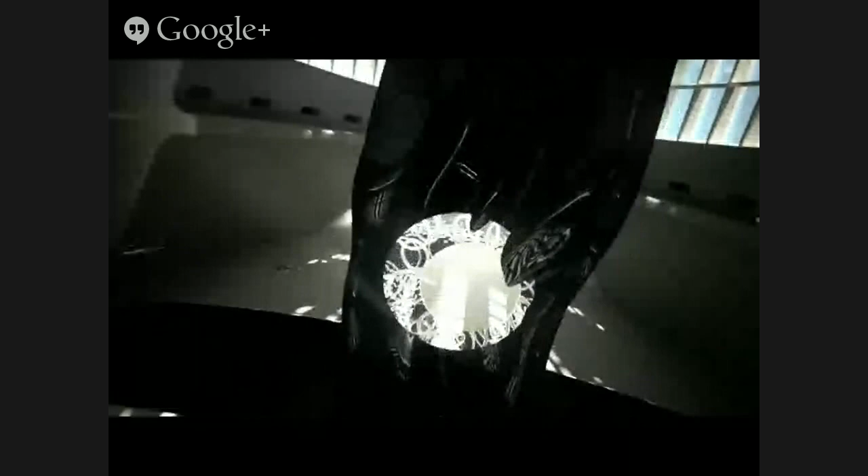This was like an introduction video of that, and we also made a website. I'm showing these because the appearance seems professional, but now I'm going to show you the background of that, so it's a little bit funny. This was the website.

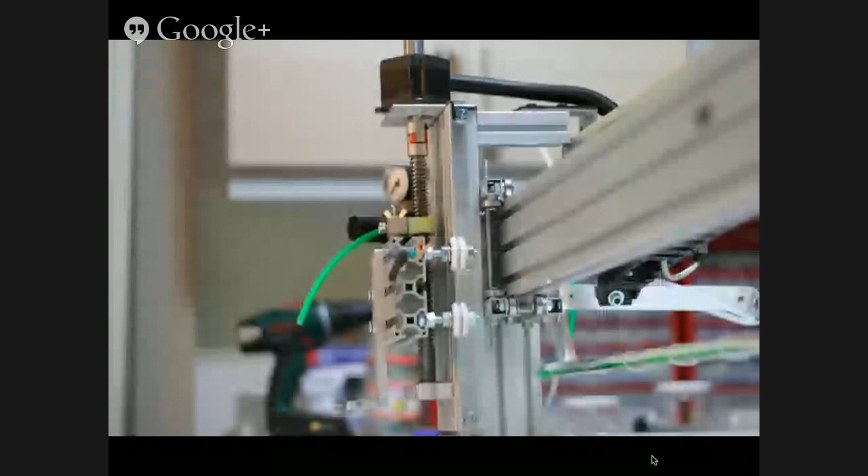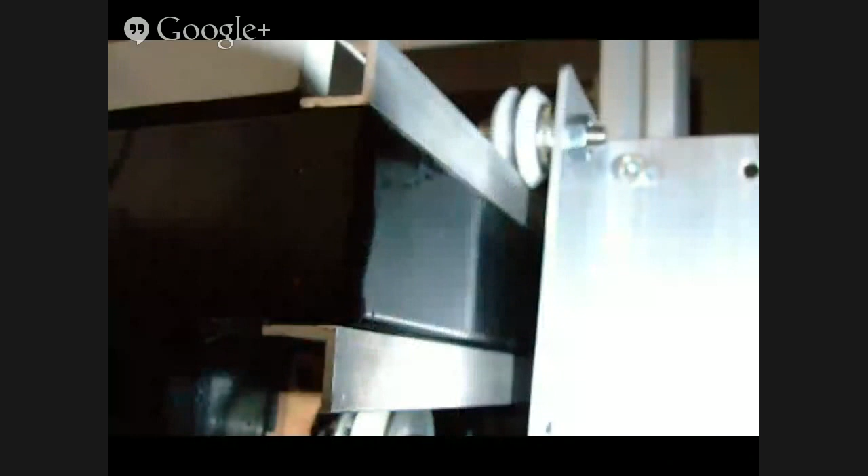So there are some components related with that. These are regular bearings, linear bearings. Stepper motors, everything is normal. And these are the normal L-shaped aluminum profiles, very cheap.

Because one of the most expensive parts in these machines are the linear motion systems. We needed a machine in the size of like 230 centimeters to 160 centimeters, and if you consider such a size, the costs related with linear motion were too high.

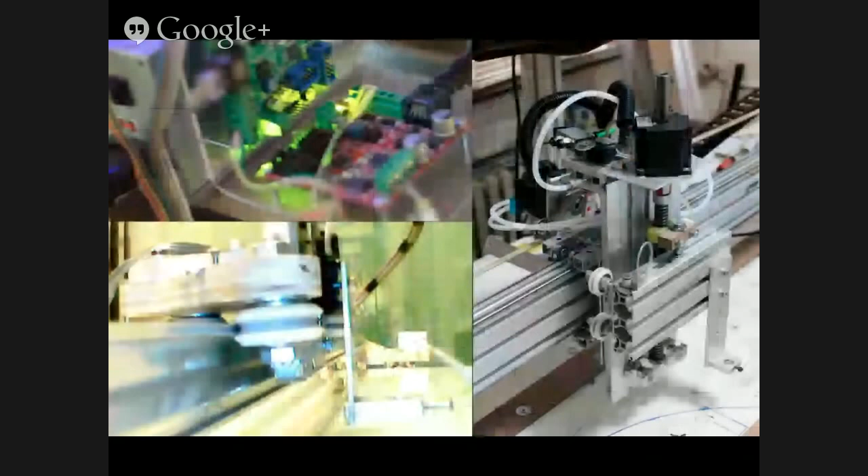This is the previous part that I showed. These are the material feeds, and this is the MakerBot electronics. This is the first machine that I did.

This is version 4 or 5 on the same table, but this is the second machine that I made, which is much smaller but works much faster. The funny thing is this part is taken from a CD-ROM drive bay, the part that holds the laser that reads the CD.

This stepper motor here is taken from a printer, and this wooden part is cut in this machine. This is a profile that is used for glass balconies made in Turkey, something similar to that.

Another special thing about this technique is the surface is not stair-stepped. The surface properties of the mirrors are perfectly smooth, because of a specialized post-process that we use. So these surfaces start to act like magnifying glasses on the surface of the mirror.

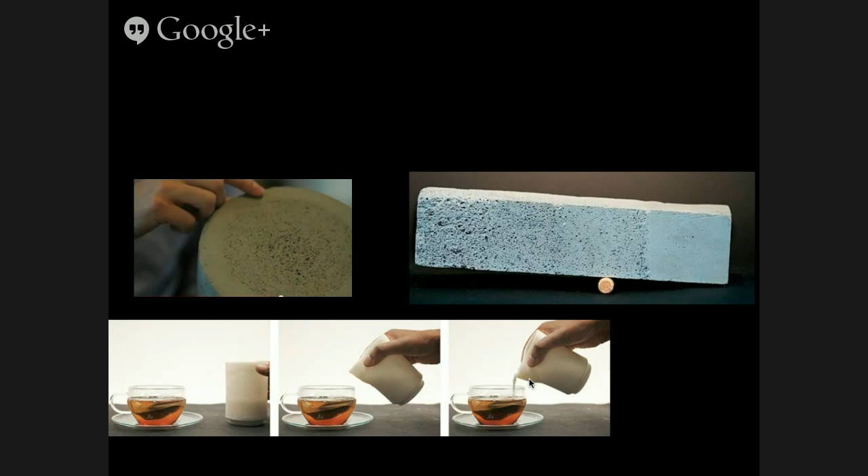The rapid prototyping has this problem: you get something out of the machine, and it is both a finished product and an intermediary product at the same time, and you cannot progress it from there. If it's a finished product, the object cannot be modified; if it's an intermediary product, the design process is continuing. Thus it becomes a verification product rather than an end product, contained in this loop-like thing in a conventional understanding of rapid prototyping.

It's now changing, obviously. As industrial designers, the relation with technology should not be looking from the outside, like buying a 3D printer and just making things the machine allows you to make, and nothing more. That has high potential too, but I think the way to change things lies through involving yourself in the making of this technology, in its progress, deriving things from this technology. I think that will change many things also.

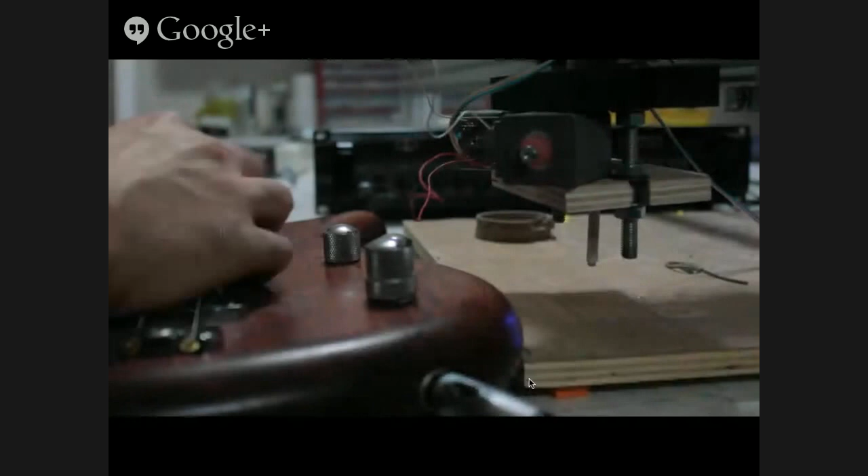So when I started the PhD here, this project I will show you was made for a physical design course. The idea was to use a physical object to intervene into this process. For example, you can take a hammer and hit the head of the machine, but that probably won't result in a meaningful object, only non-functional changes. So, with the tools we have and are familiar with, we have the ability to intervene into the process. That was the question.

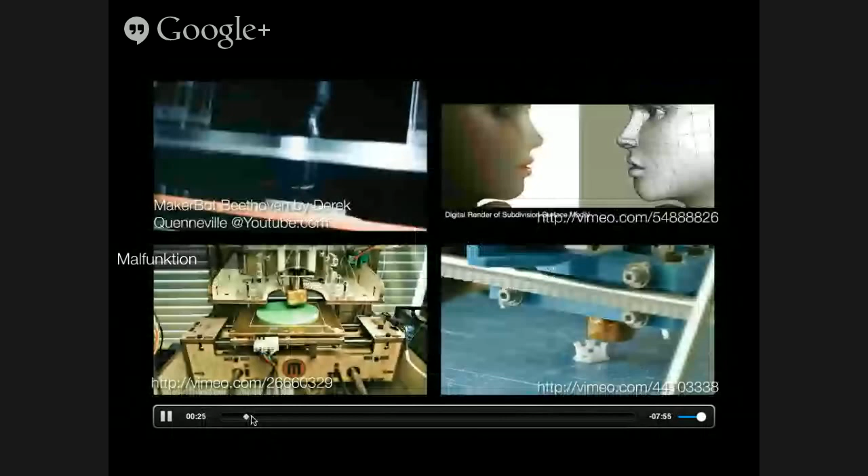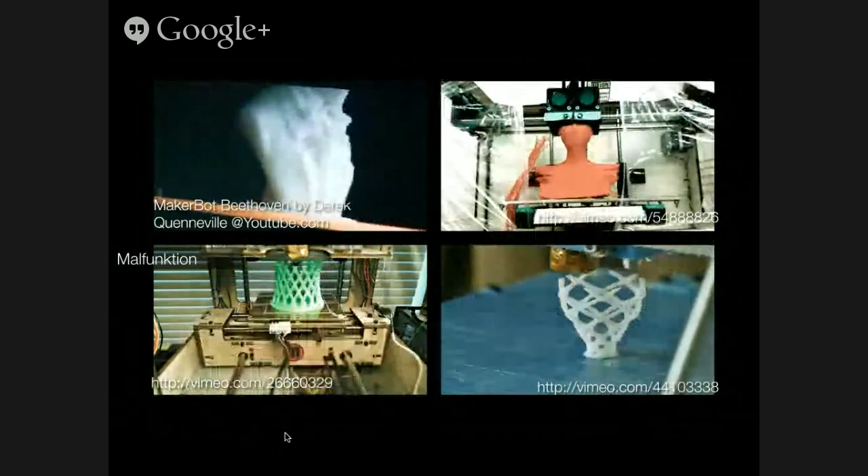So I decided on plugging a basic element into the head of the 3D printer. These are all things needed for plastics, but because the work we do has nothing related with plastics, I did not try plastics, but rather silicone, clay, chocolate, and such materials. So this is maybe regular silicone.

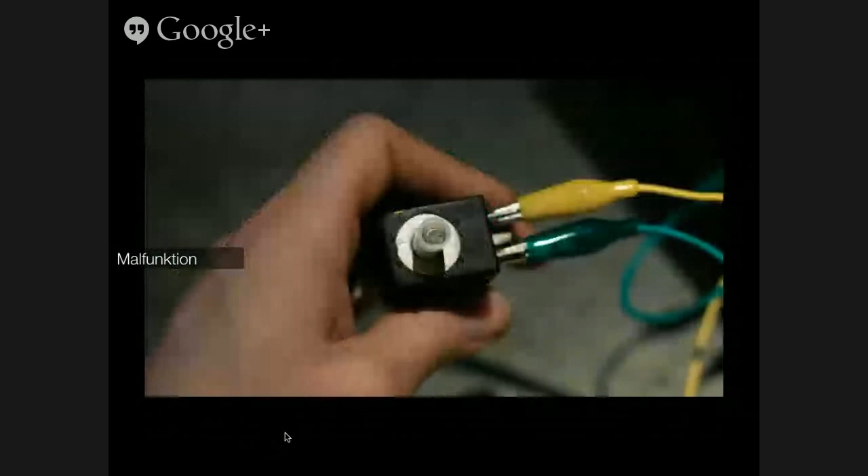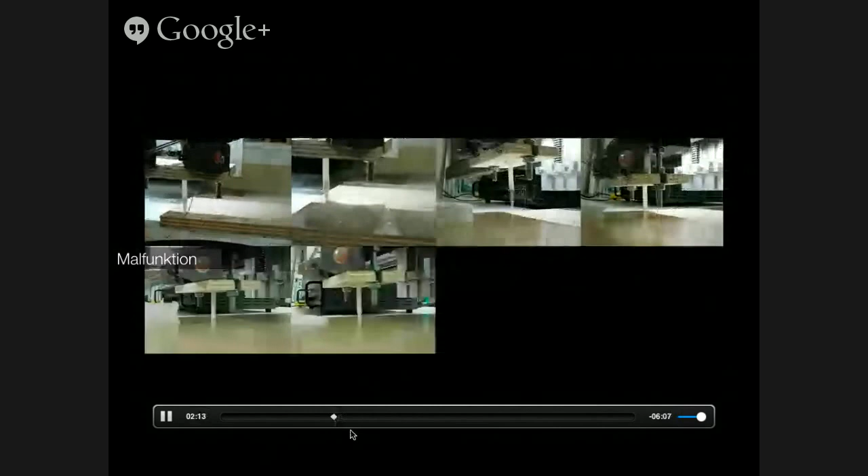Yeah, first I had to make some tests. I decided to make a regular cylinder just as a test object, just to see how the process of the object varies with the things that I create.

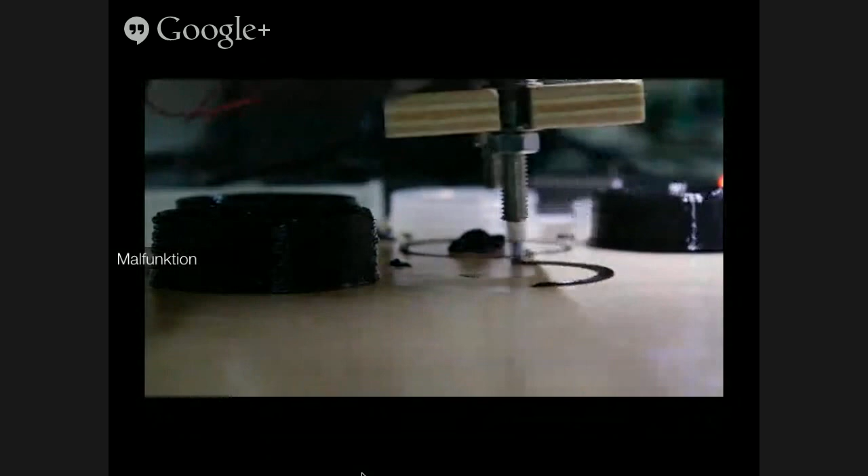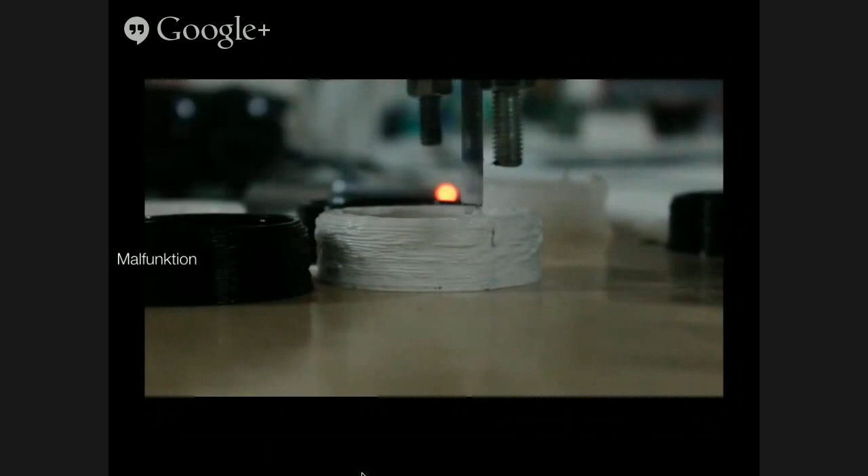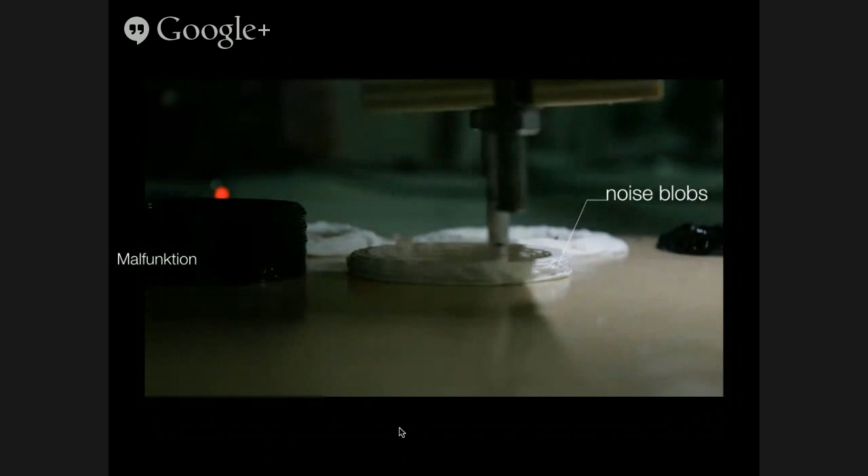Then I tried some. The previous slide was without sound, just to make it still like that. And we are done with some audio loops, mainly bass. Why bass? So then I passed on to the live session.

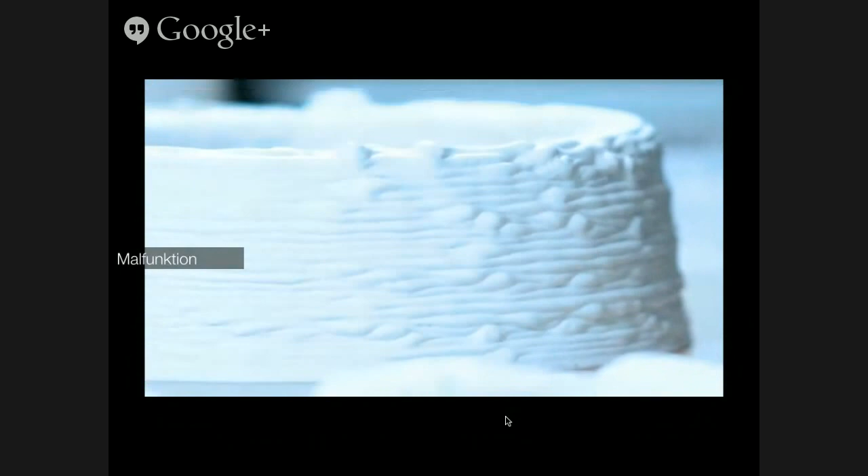Yeah, this is the one that I played. I messed it a lot. The question here is not to create a beautiful object and things like that, not to create a product, obviously.

So it also connects a physical interface that we are familiar with to the manufacturing process, and it also modifies the object without completely destroying it. It, in a way, forces your performance onto the surface of the object. It makes the object malleable, or something like that.

So these are the resulting pieces. This is the test cylinder. These are the other ones.

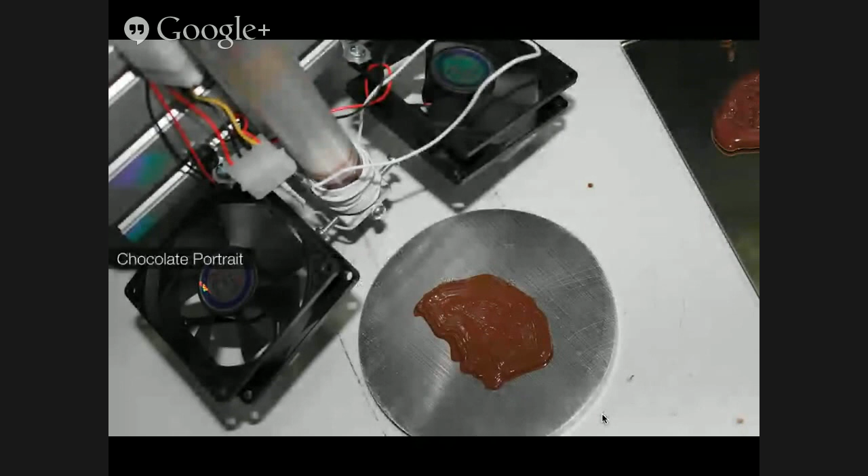In between these things, I was also trying new things. Actually, I did not have much time, but this was a portrait try that is not so well done, with chocolate.

These were the typo tries. I was not thinking of making any complex tries because actually I did not have time.

Chocolate. The wire, the coil there, heats the chocolate in this syringe. So it's a rather sensitive process, because if the chocolate temperature is just below a certain amount, it clogs the nozzle, so you cannot make it.

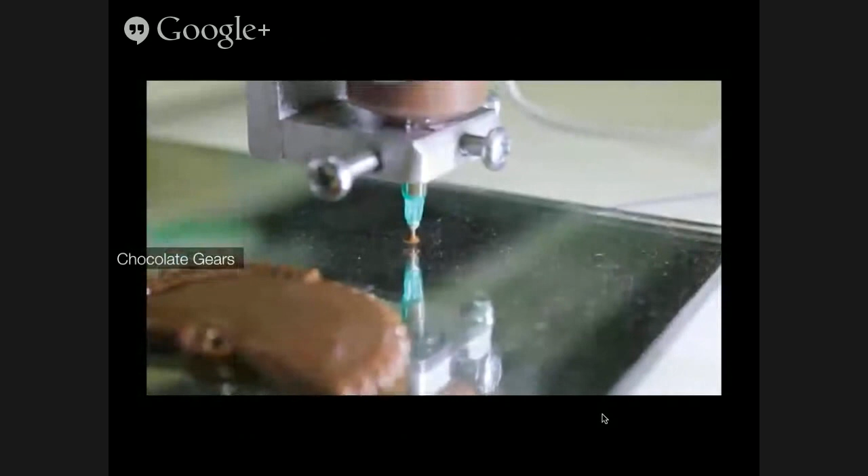So this is a really thin nozzle, medium nozzle, regular — like gears or something like that.

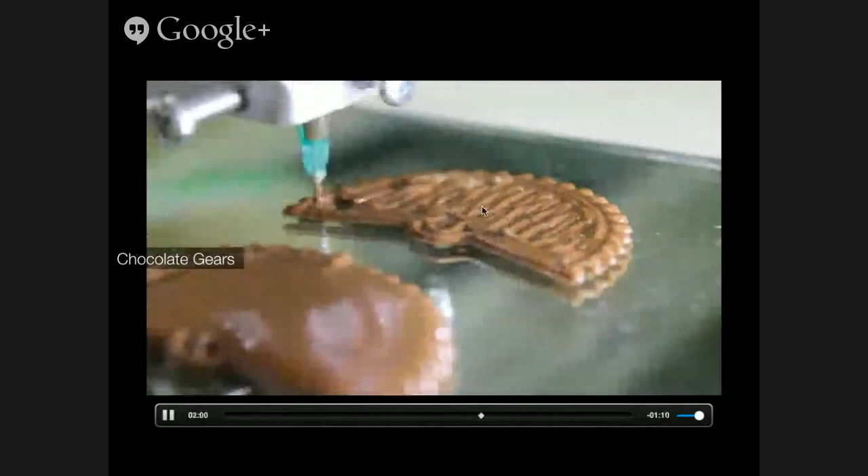So now the temperature is above the normal or above the optimal temperature, so it collapses. It should be slightly less. Also, there are two fans cooling the extruded chocolate here, computer fans, but sometimes they don't work that well. Actually, you'd have to optimize the system after doing it, but I didn't have that much time.

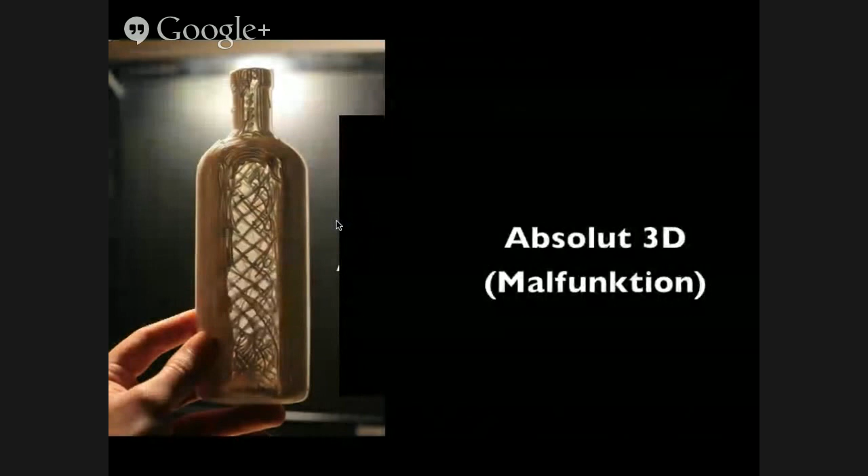So I also tried the insulation silicone that you buy for 5 euros, something like that. This one is supposed to be an Absolut 3D product, but after some time it collapsed.

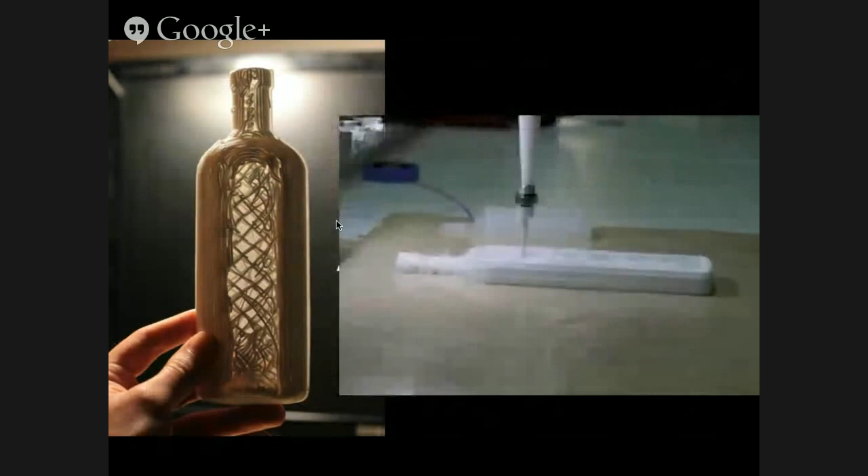Because the wall starts to collapse slightly in the previous layer, so when it passed on top of that, it failed completely. It was also related to the input amount — the input was not sufficient to hold that in place.

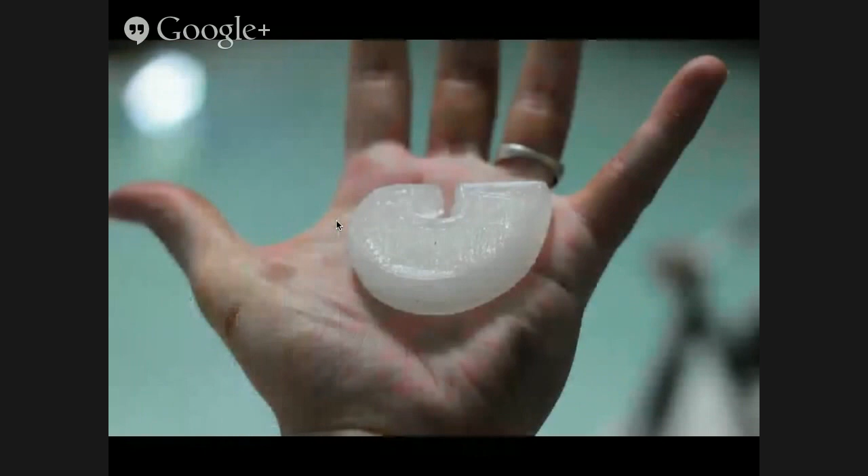There should be a type like Absolut 3D. It became an absolute fail, but I actually liked to include it in the style of the process, so I kept it and showed it. This was done with a much thinner layer height and thickness.

This was also one of the tries. And this one — they stick well to the windows after being cured, so they make nice window ornaments.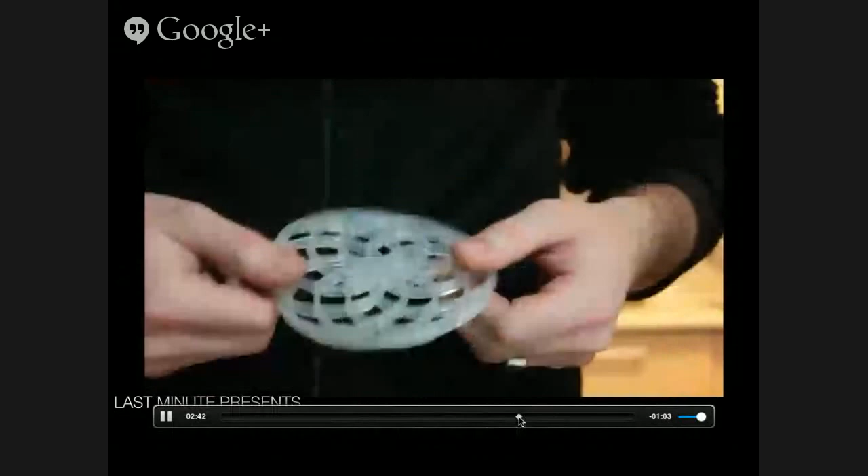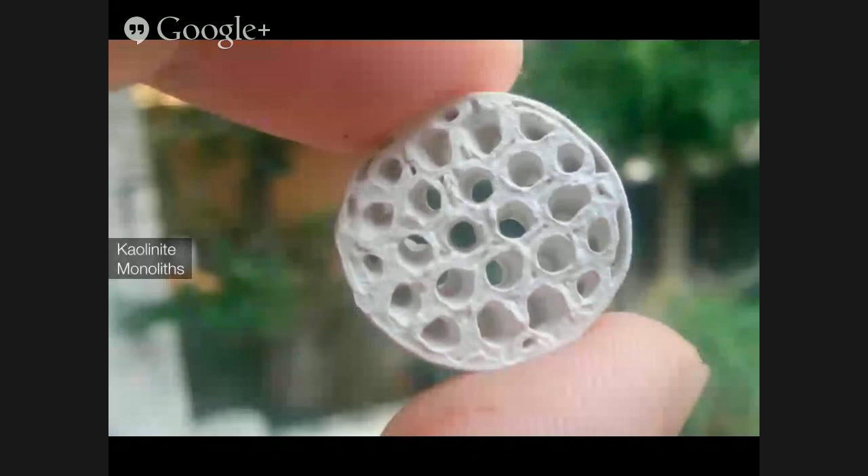They developed some special catalysts that are used to filter poisonous gases, and they developed some technologies on top of them. So, in order to test these catalysts, they purchase monolithic structures mainly made from ceramics, and they dip that ceramic — that ceramic part is like a cylinder with tiny channels inside, many channels.

So they dip that object, that monolith, into the catalyst solution, and they get it out, and they fire it in between these processes. So they call it dip coating. The catalyst forms a surface on top of that monolith that covers it.

So we were thinking of increasing the efficiency of these monoliths by increasing the surface area inside the monolith. This is not so obvious in this first try, but the channels go twisting inside that monolith. You cannot make this with conventional manufacturing, but additive manufacturing, 3D printing, allows this. So we decided to try that.

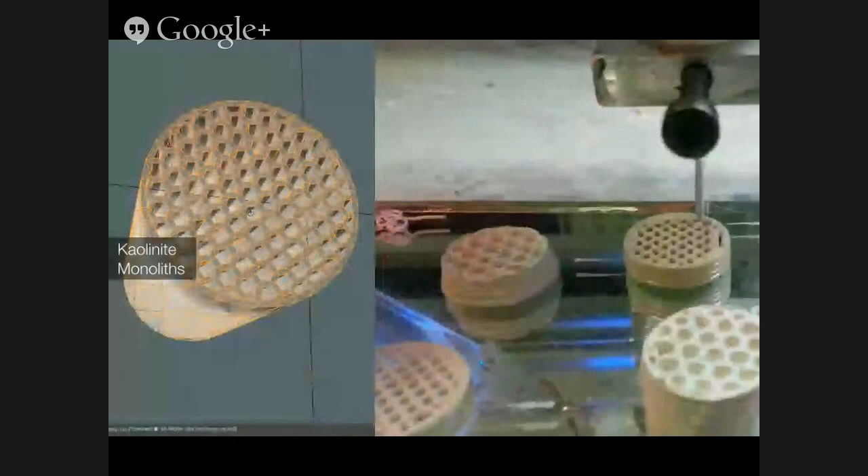This is a more straight one. This is made from kaolinite — it is a high temperature ceramic. So it was fired at 1,200 degrees Celsius. This is the regular clay.

It glass-liquefied in a way, but those are fine.

So that was another project, and now I'll show some examples from my clay experiments. This was done for a sustainable lighting project for the course.

I'll show you in the later slides, but first I'll show some forms. This was like a knot going through each other.

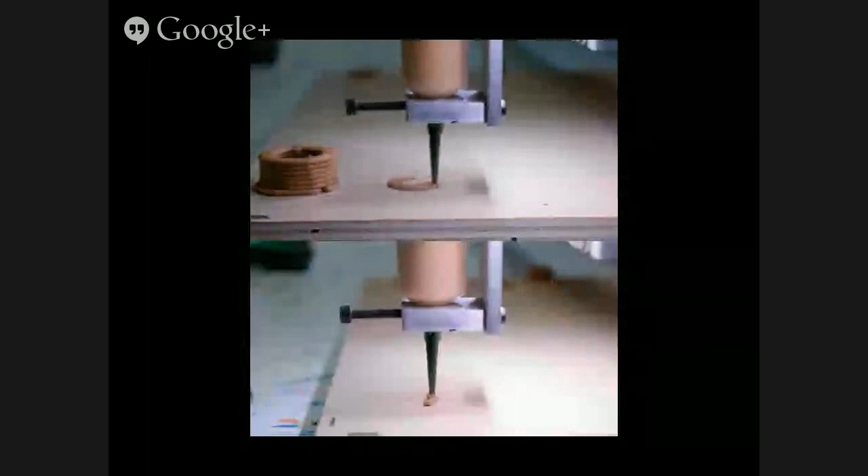This was among the first tries with the clay, so it worked well — not so well, but it can be optimized. And this is literally my first try with clay.

Actually, clay is a beautiful material because it can carry its own weight. Obviously, if you go too high or too wide, it will obviously collapse, but it allows, to an extent, to do many things. So it's worth exploring, I think.

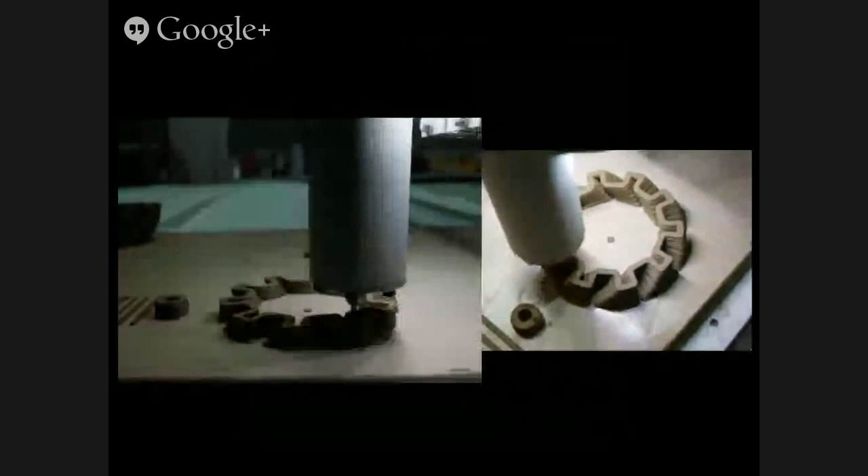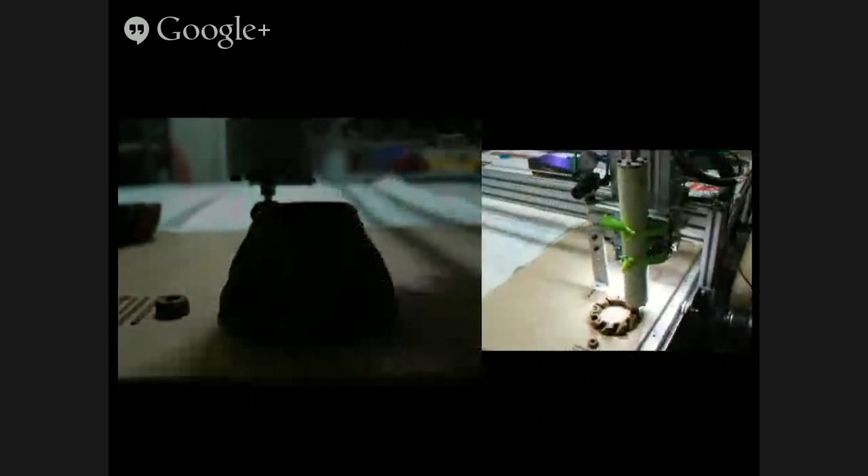So this is another object. The normal containers don't have that much clay inside, so I made another container, a pressurized container, with a lot of water pipes. Again, cheap.

This was for that project, sustainable lighting, for the course on design for sustainability. The idea of this lighting lampshade was: out of clay we make things, fire them, and use them. But this project integrates a ready-made object with a lamp base bought from IKEA for 10 liras or so, combined with a clay lampshade. That lampshade, after being manufactured, isn't fired. It becomes hard after drying, the biscuit state, but it's not fired. So if you put it in water again, it dissolves, and you can use it for another build, another object. The point was completely recyclable shapes.

There was also a funny thing here, like this spot. During the manufacturing of that lampshade, a calendar reminder popped up on this computer, so it paused for a while.

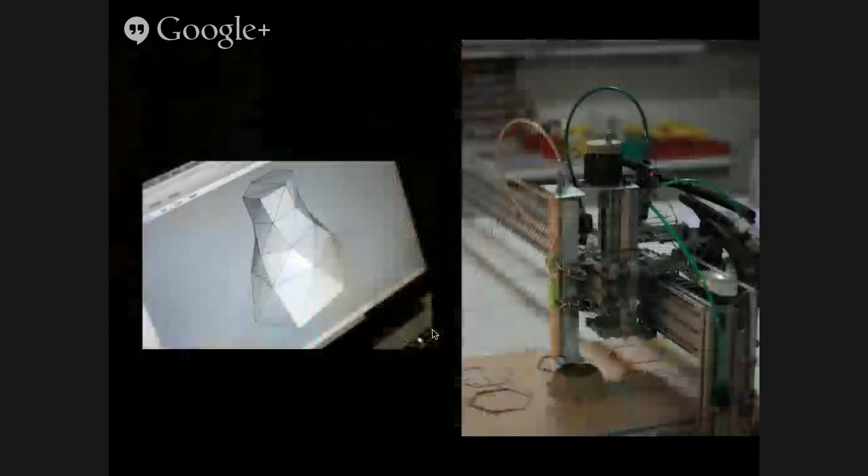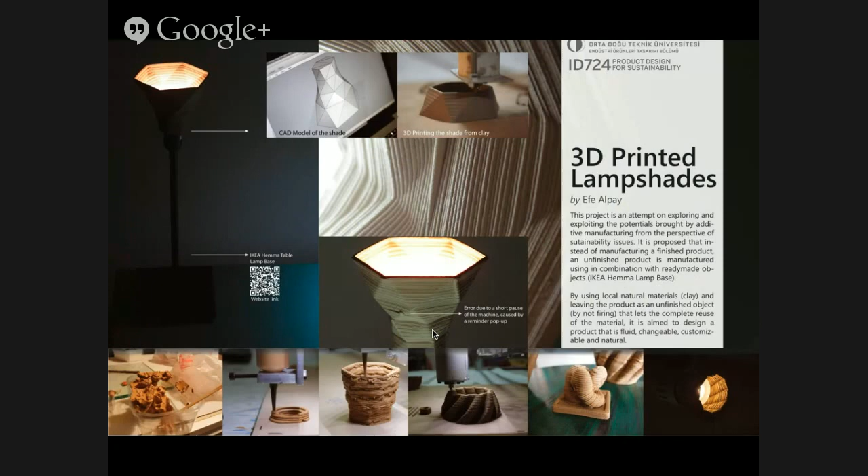This was the computer model and that being made. Actually, clay is very beautiful, but it's very labor intensive to make this, because you have something like mud, and you take a spatula, take some material, put it inside, take some material, put it inside. It takes like an hour or 40 minutes to fill that water pipe I showed. Filling this takes a lot. That's the only part that I don't like.

From these physical trials—connecting guitar to a printer and material things—I started to pass on to the digital part, because in a way it allowed more freedom without labor-intensive work. So it started with these things. I started to investigate the meaning and value of the things that are manufactured.

If you have a chance, could you please go to efealpay.com? I'll just show you a funny thing. These are, again, made for a course in critique of design, I guess. It was like transforming sound and motion into a form, and there was a setup like this. This vase is—

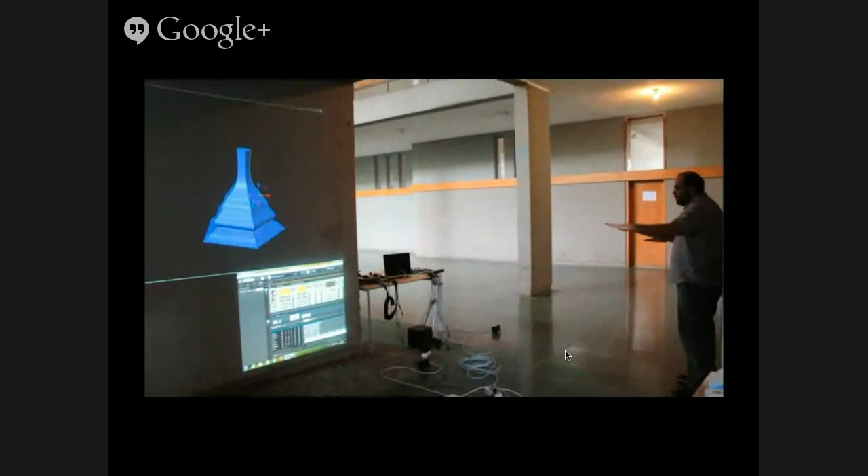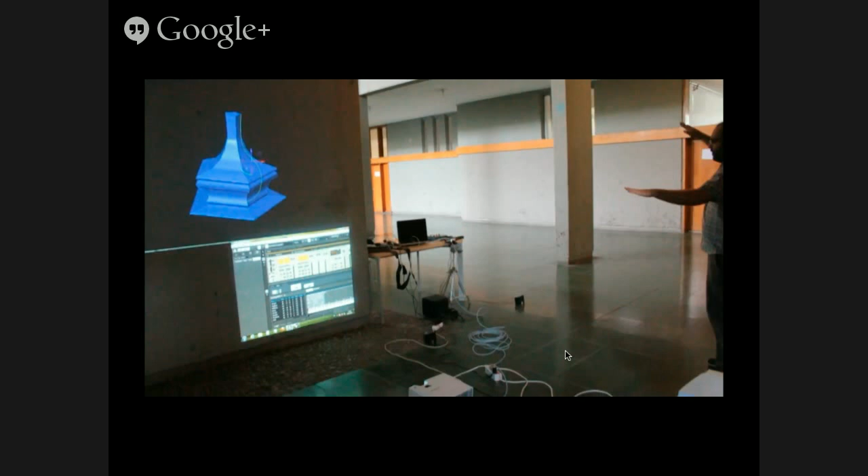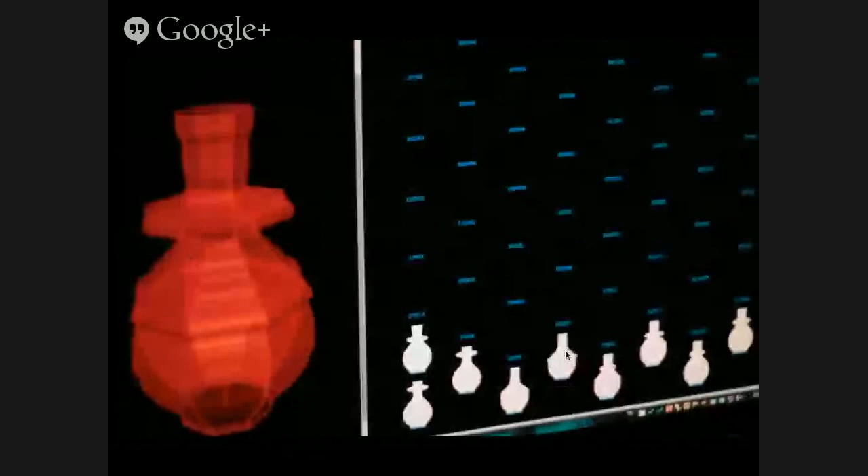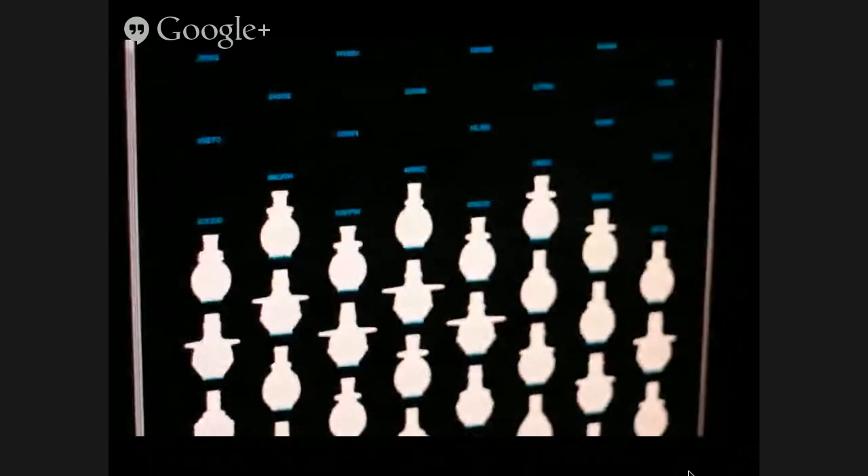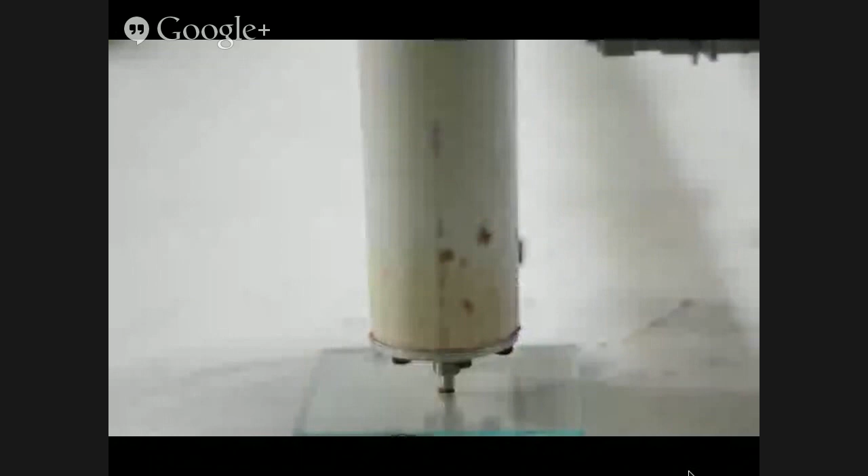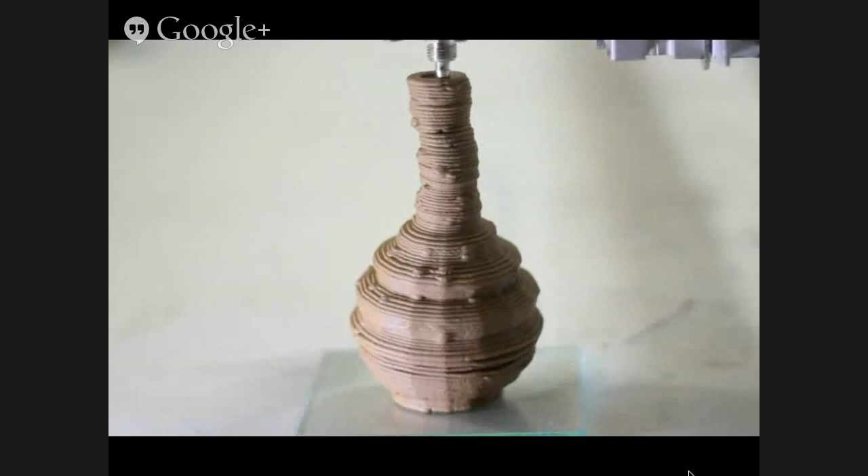Obviously there's a question: this isn't creating something from scratch. It takes an initial base model and distorts it. So there's also a question of how can we make something from scratch, maybe. And then it's made—you'll notice there's some collapse after some point. But it carries a lot, so you can make many things. There's a process that also integrates support structures into this clay method, and there's also 3D printing onto the powder bed of clay. That has much more potential than this, but this is a cheap way to try many things.

So what lies next in my studies? In the next stage of my PhD—which is still continuing, and I'm always in the middle of nowhere—the question was: after all these trials, experiments and experiences, is it possible to manufacture an object that has connections to our past from the moment of its creation? So you make a thing, but it's instantly related to your past, or something that belongs to you. In terms of our relation with objects, we can have meaning only if, for example, that object is given by a relative, a present, an heirloom—such things obviously have meaning inside. But what if we had the chance to make an object with meaning from the moment of its creation? So that passes on—I'm now trying to forge meaning into form. It's related to the power of memories and personal needs.